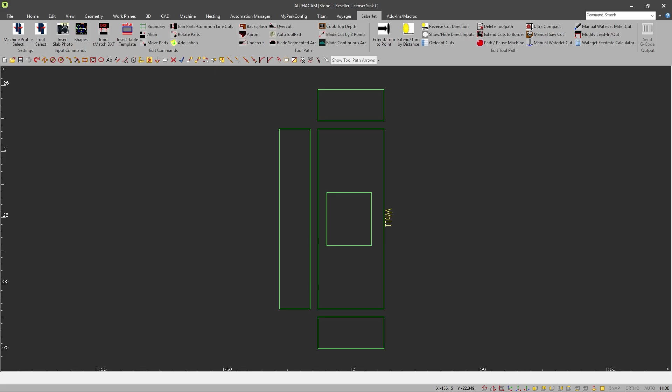There are many ways to construct an integrated sink. In this video, I'll pick one method and I'll concentrate on how to calculate or figure out the angles that are needed for the miters. So first, let's focus on the build method that I'll be using in this video.

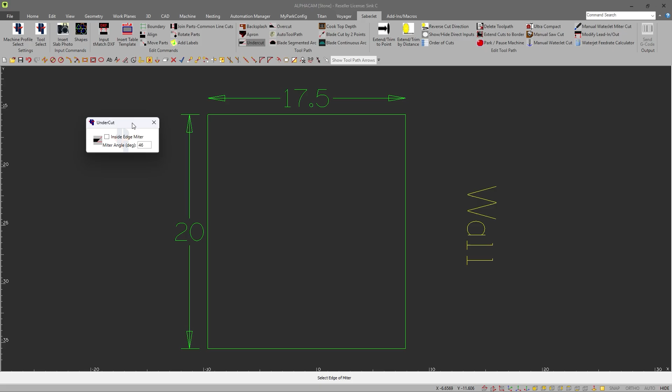So here's a top view showing some of the major parts that I'll be using. We'll start with the sidewalls. Note how the left, right, and back walls are outside of the sink opening. So we're going to use miter cuts on those, which would be undercuts, and we'll set the angle or degree, and don't forget to check the inside edge miter.

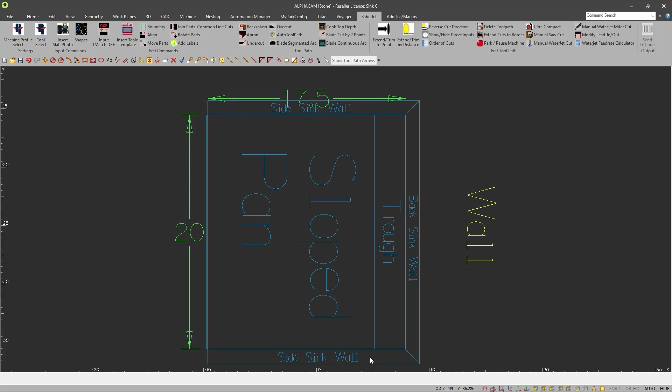I'm now going to miter the edge where the slope pan is mounting. I'm also going to miter both ends of the back sink wall and one end of each side sink wall. These will be overcut miters since the polished side is on the inside. Let's take a closer look at these parts.

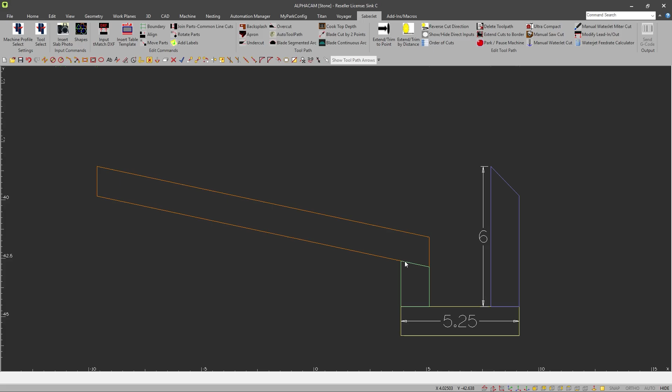When we draw the parts in a side view, it's much easier to figure out the angles. Each part is basically a rectangle representing their length and thickness and placed in the proper location. The parts with the miters might be a little bit more complex, but here's how I'd go about it. I'll start off with drawing two rectangles representing the side view of the countertop. These must be drawn to the proper thickness and location to represent the sink opening.

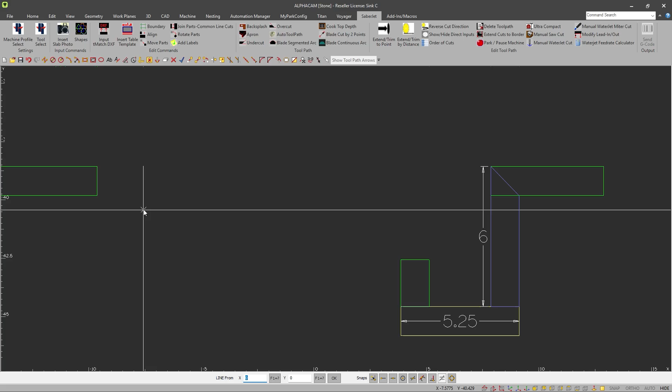I've also drawn a rectangle to represent the short side of the inner wall, which my slope pan will rest on. And I'll draw the bottom of my slope pan, starting with a line from the bottom of my countertop down to my short inner wall. And next, I'll offset that line to represent the thickness of my material.

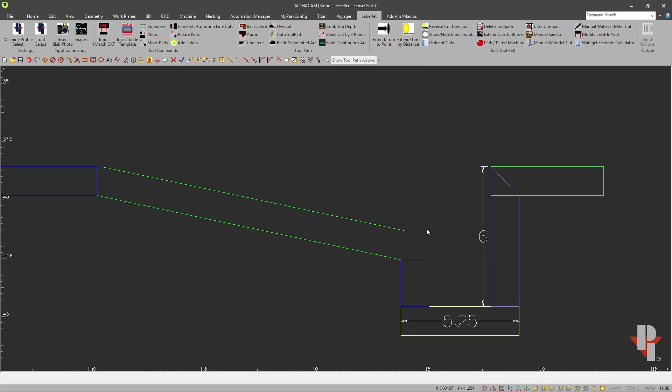And to draw the ends in properly, I'm going to start by exploding each of the rectangles that it is touching. And now I can use extend to extend the top line to make it the correct length. The top line will be too high because of the angle, so we'll move both lines down together, snapping from the endpoint to the endpoint.

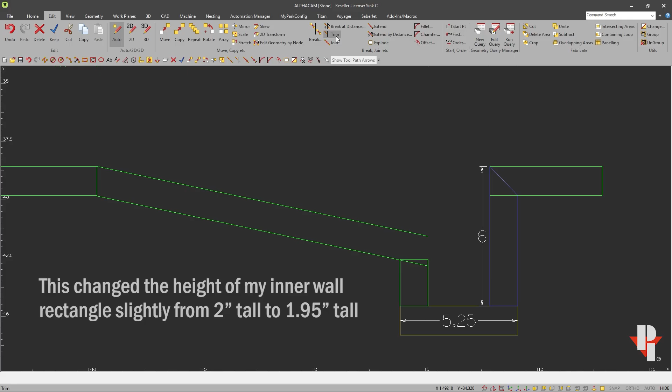This also moves the bottom of our slope part below the rectangle we drew as the inner wall. So I'm going to extend the bottom line to the edge of the inner wall, and then I can trim it off to the correct length, including the needed miter angle. And now I'll draw lines from endpoint to endpoint on both ends of my slope part to represent the miters.

Next, I'll get the lengths of my parts using either the dimensions or distance and angle. I'll always measure the polished side. I used a line to get the measurement of the part with the angle. We'll also need the two side walls of the sink. We can get these by drawing a rectangle and thinking about the polished side starting at the upper left endpoint to the polished edge of the back inside to the very bottom at the intersection.

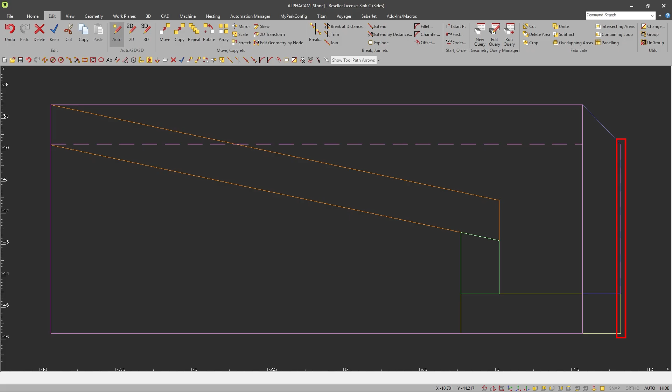These parts will have undercut miters on the top edges and overcut miters on the ends. Here's how they'll look laying down with the polished side up. I'll apply the overcut miters to the ends a little less than 45 degrees. I also need to apply undercut miters to the top edges of my parts so that they fit into the undercut miters that we have on our top.

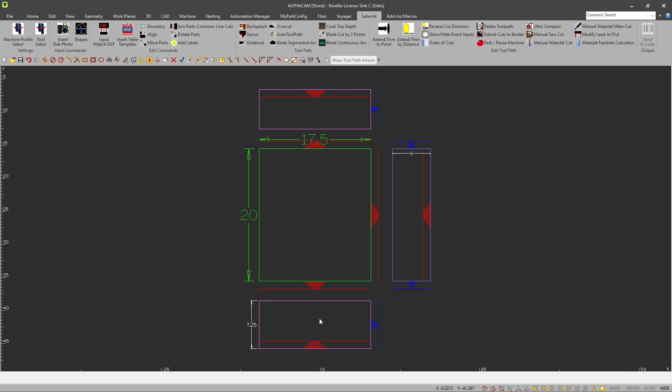And now that we have the size and angles for our three side walls, let's get the angles for our slope pan and our inner wall. It's important to remember that all references, measurements, and angles come from the polished side of our material.

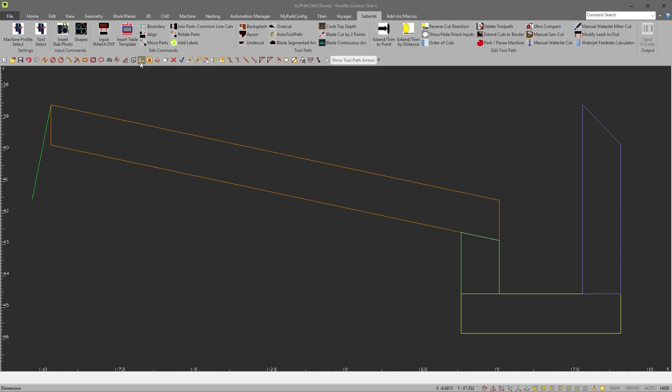To get my angle, I'm going to draw a line from the end of the part perpendicular to its polished face, and then I'm going to drag this line down long enough so I can work with it. This line is going to be my 90-degree reference line so that I can use dimensions and angle to go between the two. Remember to always select counterclockwise. And I'll repeat this process on the other end.

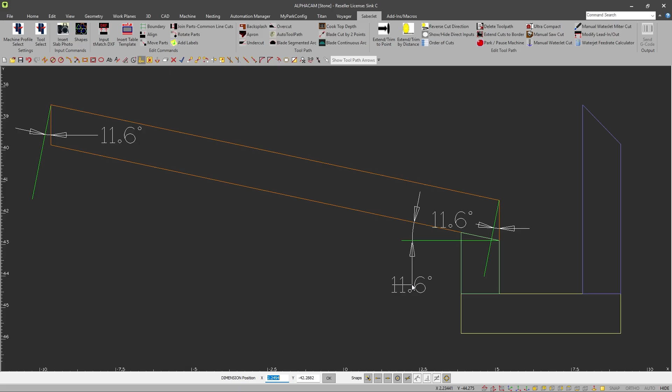I'll start by drawing a line from the end of the polished side and then perpendicular to it, dragging my line down so that I can use dimensions to define the angle, selecting counterclockwise. Repeating that process on the inner wall, referring to the polished side for my line, and then defining the angle in a counterclockwise direction. Now that we've found all the measurements, we can create the parts.

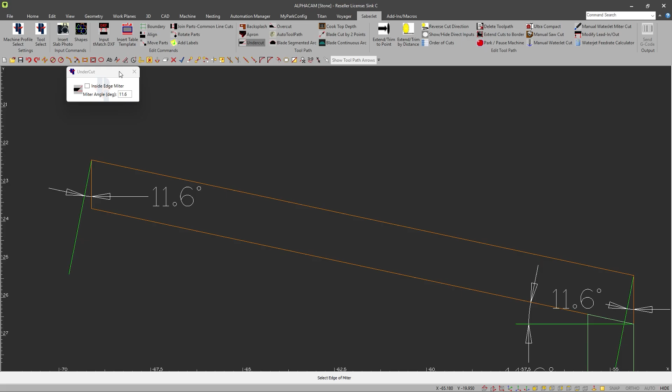We'll start with the measurements. Laying out the rectangles, I just use my backsplash button against the sink opening. And now, with our parts created, we can add in the miters. I'll start at this end of our sloped part. And referencing from the polished side, I can see that the blade goes under. So I'll choose undercut and set the miter angle to 11.6 degrees, and then I'll apply it to the proper edge of my part.

The miter at the other end is also an 11.6 degree angle, but as we can see, this one is an overcut. So I'll select overcut, verify the angle, and apply it to the proper edge of my part. And my last angle on this inner wall is also an overcut of 11.6 degrees. So I'll apply that as well.

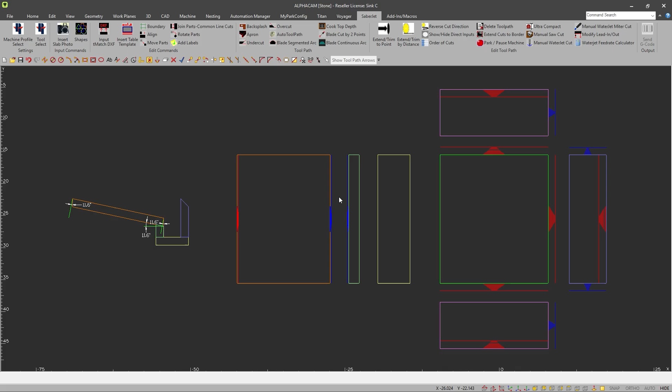And now with all my parts drawn to size and proper miter angles applied, I can arrange them out on a sheet and auto toolpath them to make my program.